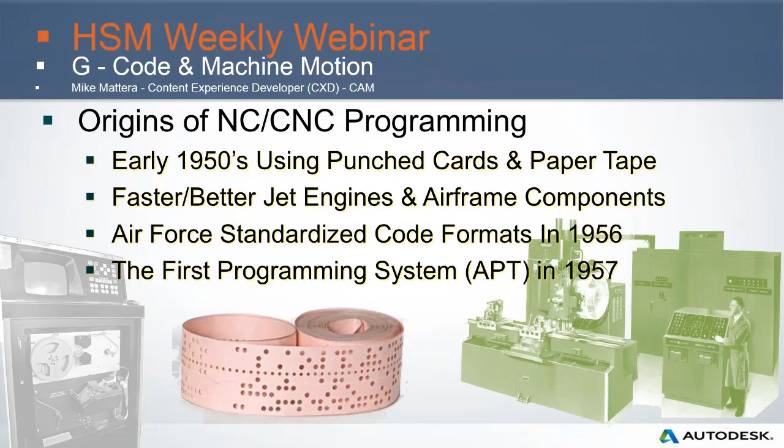So G-code programming. Why alphanumeric codes? Why did they decide that that was the best way to convey information to these machines? Well, it was a simple way to define a motion or a function, or to declare a position. We're all used to X, Y, Z axes on a machine. It was also an easy way to set a value, to select an item, or to switch something on or off. You just have some kind of an alpha letter designation with some kind of a number designating what it's supposed to be.

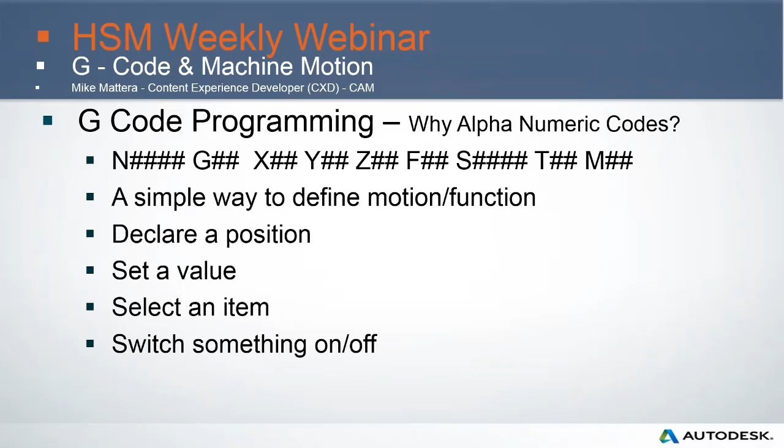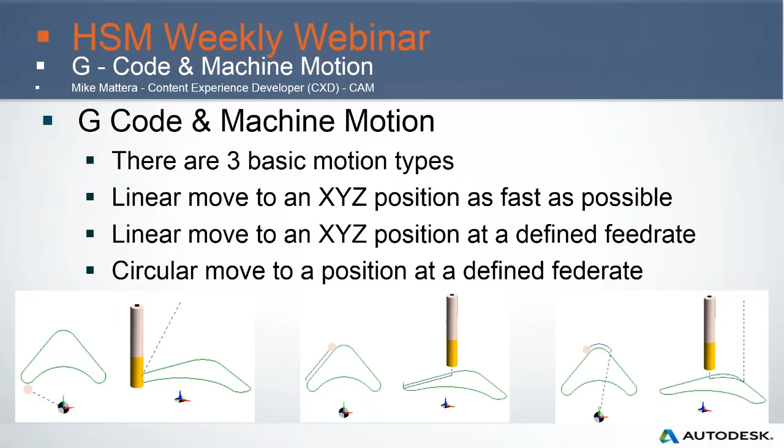Somebody decided we're going to use G, and they decided that to represent a rapid move, we're going to use G00. And that is the number 0, not the letter O. Keep that in mind when you're looking at these programs. But I like to think that they picked G0 because it looks so much like go. Go as fast as you can to this XY position.

And then we have linear feed, which is a G01. Now again, this is just a way for me to remember it, but when I look at the 1, I think of it as an arrow, a linear arrow moving along a distance. So G01 is a linear feed move.

And then we have circular motion, and there's two types, circular clockwise and circular counterclockwise. So when I look at a G02, I see the single loop for the 2, and I think clockwise. And when I see the double loop for the 3, I think counterclockwise. It's just the way I see it, and it's just something that helps me remember it. I don't think that's why they picked those, but, you know, could be. Who knows?

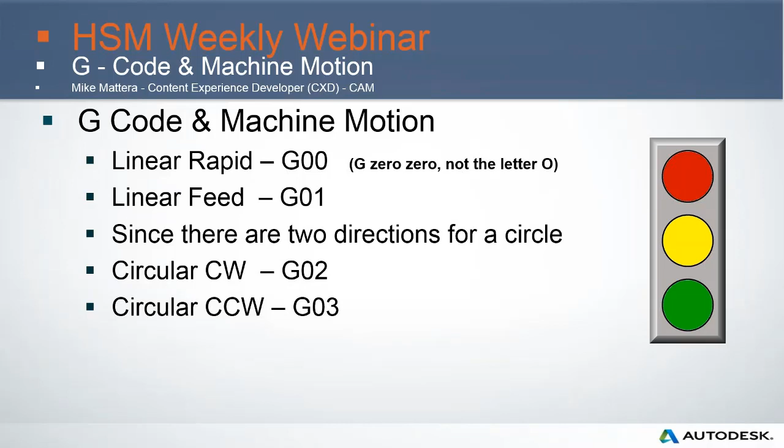So typical NC code, you're going to have some kind of an alpha and a numeric, and generally you're going to find that a G is going to be used to define some kind of a motion code. It's going to tell it how it's going to get there or what it's going to do when it gets to the point. And then you'll have something to declare a position, normally an X, Y, Z. And then we have the F word or the S word, which is used to describe a feed rate or a spindle speed. So we're setting a value for something.

And then we have the T word, which is used to select an item. In this case, we're selecting a tool. And then we have miscellaneous functions. Miscellaneous functions will switch something on or off. And on a CNC machine, there's a lot of things that you might want to switch on or off. Things like coolant, spindles, indexing motion, axis locks. There's a lot of things.

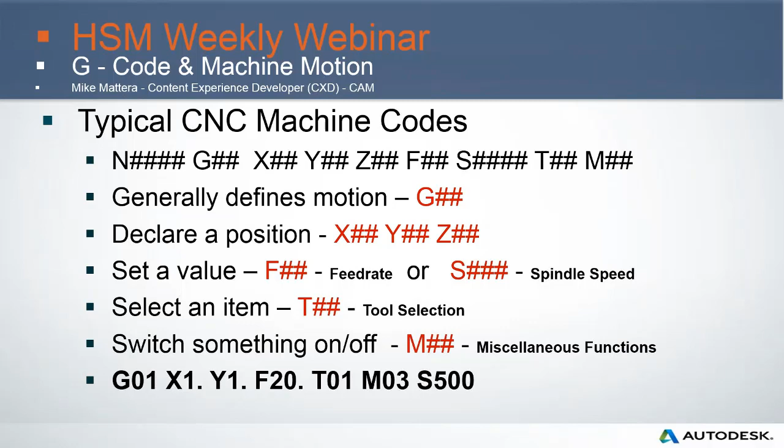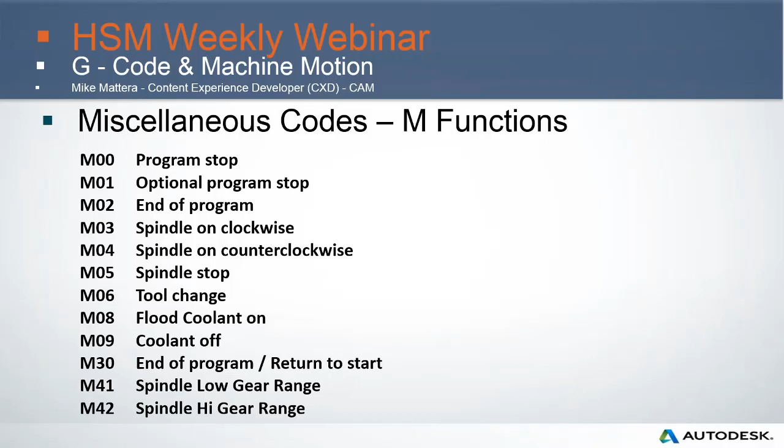Next, I want to talk about something called modality. The concept is easy. If it's on, it stays on until you turn it off. So if you have kids at home, you might be familiar with this concept. So your kids will walk through the house, and as they go from room to room, they will turn on light switches, and all the lights will be on.

And every room that they go to, the lights will get turned on. And those lights will stay on until you come home from work and walk through those rooms again and turn those lights off. So a light is an example of a modal condition. You turn it on, it stays on until you turn it off.

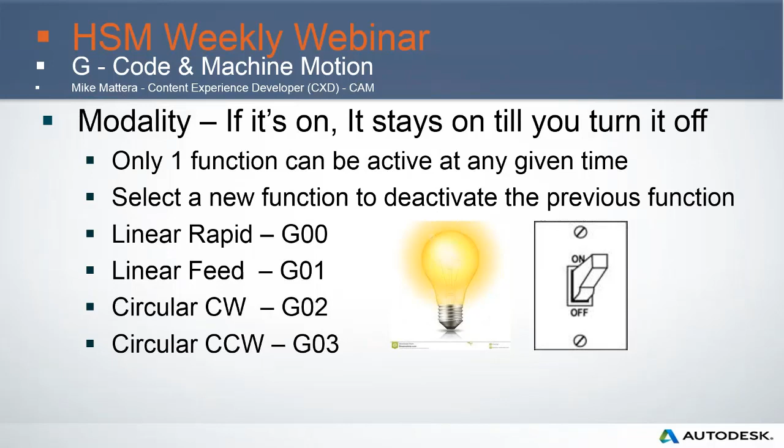Now, in the case of some of these codes, you can use an additional code to turn off the previous function. So here we have linear, feed, and clockwise and counterclockwise motion. Well, I can't do a circular clockwise move and a linear feed move at the same time. So any one of these codes will overwrite the other one.

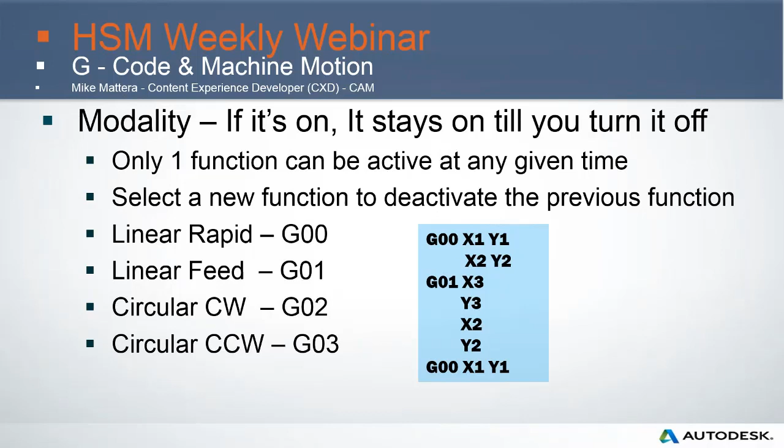So if we had a program that looked like this with a G0, which is a rapid move going to X1, Y1, the next line, I wouldn't have to say G0 again because the modal condition is a linear rapid condition. I just have to specify the XY position. Now I can say G1 with an X position, so it's going to do a linear feed to that X. Now on the subsequent lines, I just have to spell out the next Y or X position that I want to move to, and it will continue to move in a linear feed motion. So that's an example of modality. Once a condition is set, it stays active until it's turned off or some other condition overrides it.

One great example of modal conditions are canned cycles. Now, canned cycles are great because they incorporate all the motion that you would normally do to complete a common task. In this case, the task is drilling. Now, the normal drilling cycles are G80 through G89, but again, that could vary on a lot of machines. So in the case of basic drilling, you basically would move to the starting point for the location of the hole, you would rapid to the clearance plane, feed to the depth, and then rapid back out.

So if you were going to count that up, that would be 4 lines of code in your program. Rapid to the start, move to the clearance, feed to the depth, and rapid out. So if I had to go to the next location and do that again, I'd have those same 4 lines of code if I didn't have a canned cycle. So you could imagine if you were trying to drill 500 holes, that would be a lot of code. But by specifying the canned cycle, all I have to do is tell it once what I want to do, and it'll continue to do subsequent holes.

Now here's an example of a peck drilling cycle where it's taking multiple pecks to get to the final depth. Now you can imagine if I did that all with linear moves, that would be a lot of code just to do one hole. Here's an example of a counterboring cycle where it'll feed to depth, it'll dwell, and then rapid out. So that's for counterboring or polishing up the bottom of the hole. And here's another one. This is a tapping cycle where it will feed in, reverse the spindle, and then feed out. So this would be used for threading a hole, tapping a hole.

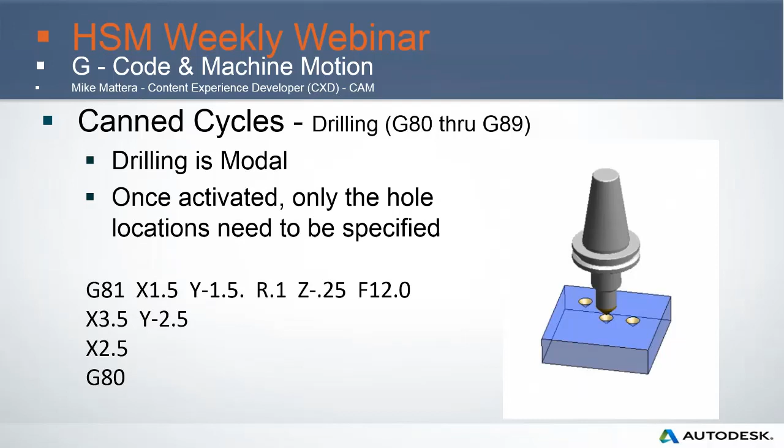So again, it's a modal condition. Once we specify the drilling cycle and the location and what we want the depth to be, all we have to do after that is specify the subsequent locations. So you can see that this would save an awful lot of programming if you had to write this program manually.

Now the next thing we have to have an idea of is code groups. Now I mentioned that a G01 will override a G0 or a G2, but there's other codes that are in that same group. So with a G81 drilling cycle, I can override that with a G80 or a G82. I can have any of these codes on a single line, but you can only have one code from each group on a line. So here we have plane selection, we have things like cutter compensation, so I could have one code from each one of these groups on a single line.

At the bottom you'll see the work offset codes, G54 through G59, and that extends out on some machines to be G59.001, 002. So you can have extended work offsets. That allows you to shift your 0 to different locations on the workpiece or different locations on the table.

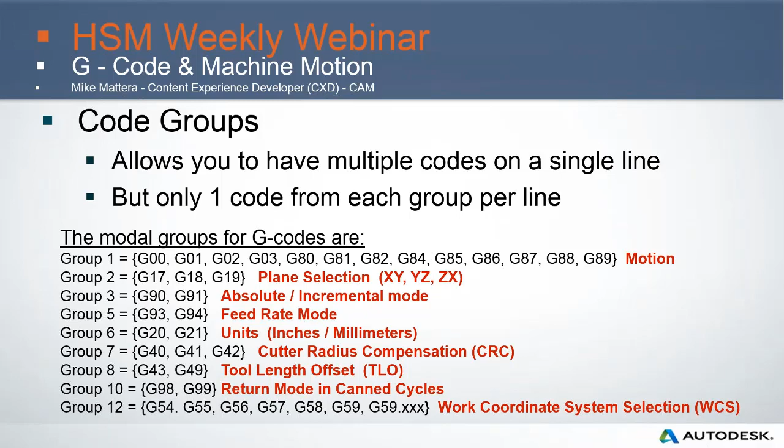All CNC code is not G code, but all machines require the same information. Not all the information is going to look the same, and that's the reason why we have 1,000 post processors in our library. Because every machine builder can take a standard CNC control and make it do whatever he wants. So because of that, we're always going to have little variations from machine manufacturer to machine manufacturer, even when they might be using the same control.

So here's an example of the kind of things that we would need to know in order to perform some kind of a CNC task. In this case, the task is creating an arc or a circular move.

So we have the green dot, which represents the starting point of the arc. We have the blue arrows, which represent the cutting direction, which could be clockwise or counterclockwise. And then we have the red dot indicating the end point of the arc. So you can see there's 4 different ways to get from the green dot to the red dot.

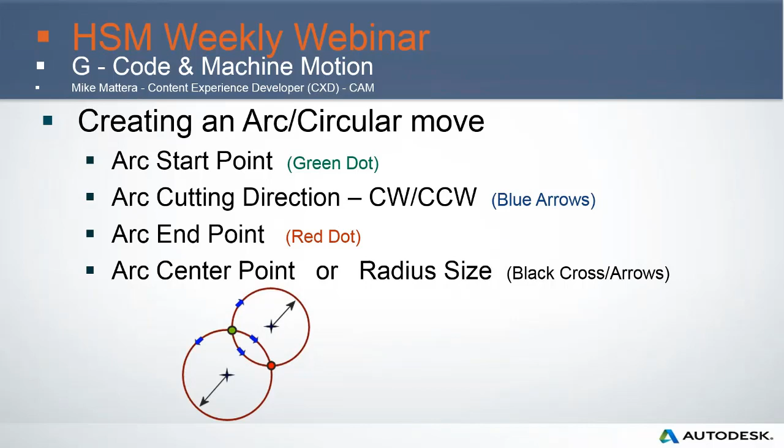But we narrow that down by giving the control more information. So when I tell it the direction that I want to go, and then if I can tell it the center point of the arc or the radius size, those are also ways to tell it specifically the kind of arc that I want to create. So we have to have that information to do an arc, no matter which control you have. It has to know these basic things.

So here's an example of what that code might look like. The first blue bar up on top shows the code that you would use for a Fanuc control or a Haas control. They're very, very similar in format. The first one shows an arc that uses an X, a Y, and an I and a J to describe the center. Next to that, it shows an X and a Y and a radius. So it's using the radius, an R plus or R minus, to determine which portion of the arc that it's doing. So that's 2 different ways of doing the exact same arc in the same control.

Next is the control that I have, which is an Anilam control. Now, Anilam was known for their conversational format. So when we look at this, we can see it says arc clockwise. We have the X and Y position. It says arc center, X center and Y center. So it's pretty obvious what that represents. And then the feed rate. And there's another way of doing it, again, within that same control, where you can say arc clockwise, the X and Y endpoint, and then we specify the radius.

And then one of my all-time favorites at the bottom is the Heidenhain control, where there's even more variation on how you can do exactly the same kind of an arc. So they do it with 2 lines. The first line describes the circle center, and the second line describes the circle direction, CW, the X and Y endpoint, and the feed rate.

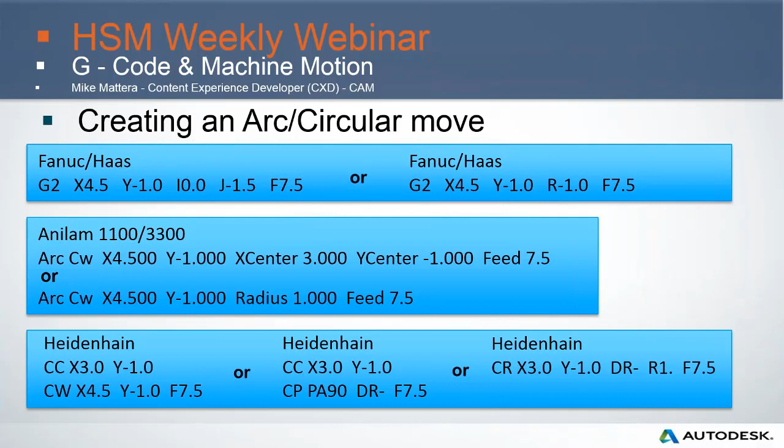So post processors, let's talk about that. A post processor is basically a translator. It translates the image of the toolpath on your screen into the language for a specific machine control. So basically you can see our toolpath here on the left, and we can see some code here on the right. It's a standard G-code format. So we have a lot of these different translators because there's a lot of different control types.

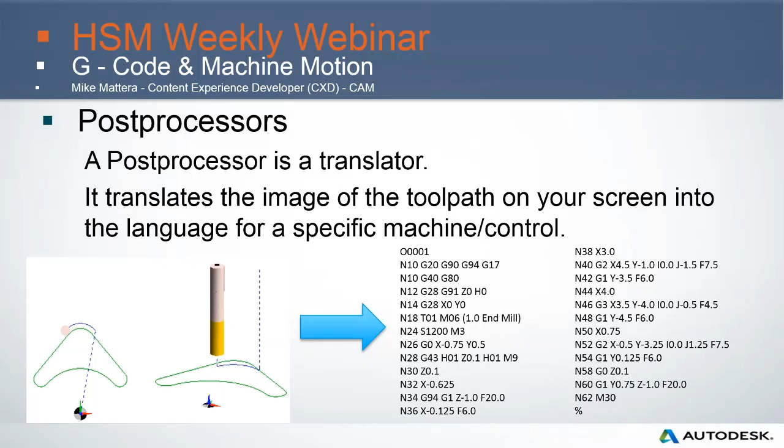Now, if you needed to have a post processor made, these are some of the things that anyone would need to know in order to help you create that post. We would need to know the machine manufacturer's name, the model of the machine, the control that's on that machine, and the model of that control. That's going to tell you which post processor you should start with as a base sample. So if you just downloaded Fusion and you just got your first CNC machine, basically you want to find that information and use that to search through our post library and find something that looks like it's going to be close to what you need.

And then you're going to use one of our sample test programs. I'm jumping ahead in my list here a little bit. But you'd use the sample test program to create code using that standard post. Some of the other things we need to know is the type of machine, the number of axes, and the axis designations. So is it a vertical mill? This is 4-axis, and the axes are called X, Y, Z, and A. That tells us a lot about which post to use. We would need a list of the G codes specifically for that machine and a list of the M codes for that machine.

So now when you take one of our standard posts and our post baseline test program, you can create code and make the changes that you need to send it out to your machine. You'll probably have to make some additional changes at the machine to get it to work specifically for your machine. But once you have that, that's the sample program we're going to use to help modify your post.

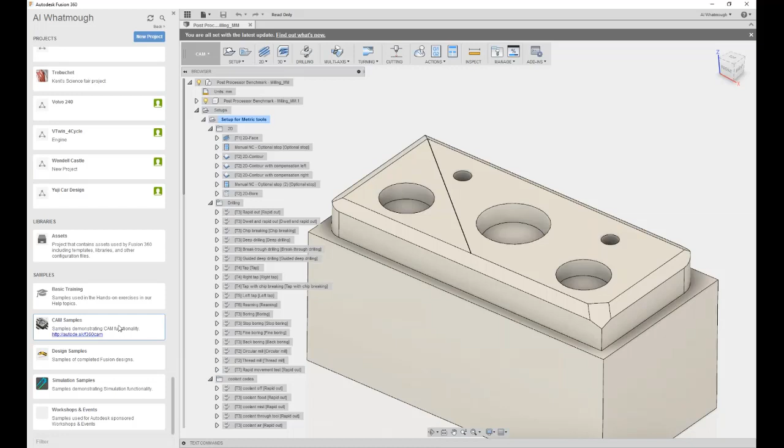But if I go into CAM samples, for many of you learning the product, again, a shout out for all the sample files. You can see ways different parts have been programmed and reverse engineer things, which I think is very helpful for many machinists, your tradespeople that learned on the job, and this is a great way to reverse engineer things.

But inside of here, there's a post-processor folder, and here you're going to find some benchmark parts that test all of the functionality of the software, the basic motion, as Mike had said, for water jet, for milling, and for things of that nature.

So if I take a look at something like I want to verify my drilling cycles, which Mike had talked about, we can look at a chip breaking cycle. We have two simple holes. I can select that operation. I can select post-process, pick a post-processor, and start to validate whether or not it's going to work on my machine. So I'm going to pick the Haas post. I'll give it a number, and I'll hit post-process.

There's a couple of things I want to show here in regards to what the post-processor can do. I probably should have prepared for a demo so that I'd know that brackets was already installed.

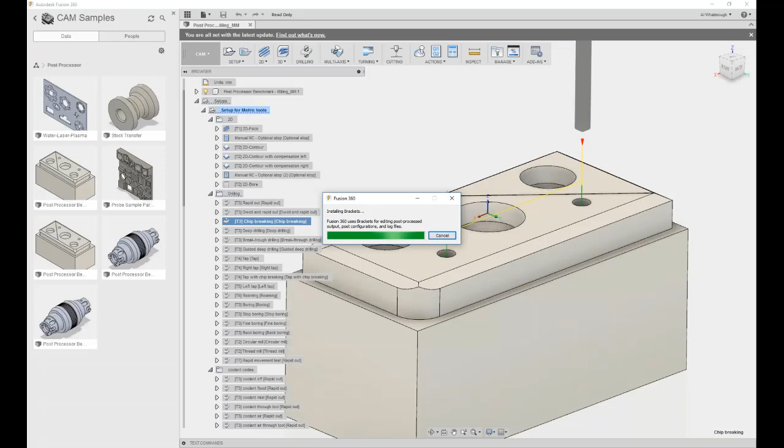I do also see a question around DXFs. Jeff, I'm sure you're aware that there is a DXF post that outputs based on color. Jeff is asking about a post based on layers. It's a great question, and I'll let one of the experts on the call here dive into that.

So this is actually interesting. What I have here, and I purposely selected the Haas post with chip breaking, I'm actually seeing this drilling cycle expanded out. You may see that there's instances where the post processor actually understands what the machine can and can't do.

In this case, our software has an ability to do incremental retracts. It'll peck, peck, peck, and then come out. That wasn't one of the canned cycles Mike talked about because it's not a common canned cycle.

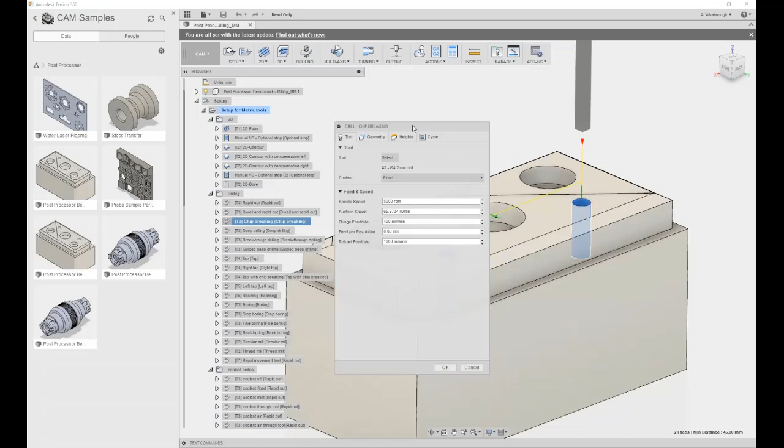If I come into this operation and I edit it - sorry, it's on my second screen here, I'll drag it over - and I come to the cycle, you'll see that I have an accumulated peck depth.

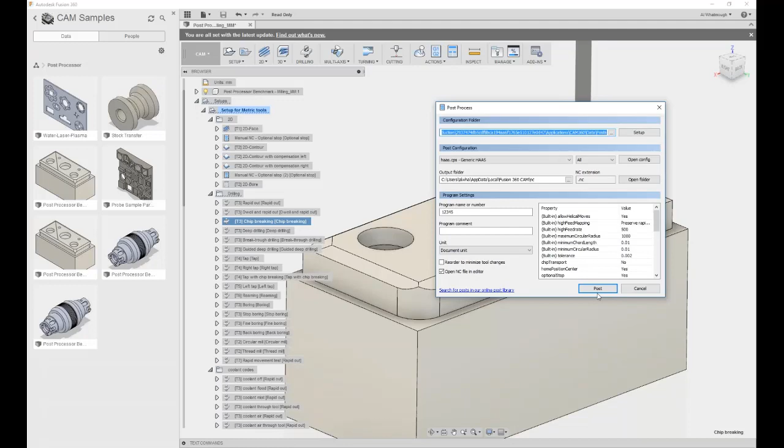That means every 5 millimeters we're going to come all the way out of the hole. So I'm just going to increase that to something like 500, so it's more than it would produce an incremental retract. And then I'm going to post-process again.

And now I have a chip breaking cycle. I wanted everybody to see that because sometimes you look and wonder, why am I not using a canned cycle? Well, the post processor is actually intelligent enough to know that we created a cycle that a canned cycle didn't support, so we went and automatically expanded the cycle. But then when we put a set of options in that didn't require the incremental retract, something that currently Haas doesn't support, we could then return to using a canned cycle.

So I think that's maybe a helpful trick. The other little trick I'll show here quickly is if you're trying to do some multi-axis programming or 4-axis programming, you'll see some very simple moves that do just a simple rotation so that you can look at a very short piece of code and identify whether or not that's happening.

I see some questions around coolant. So again, with a very simple cycle, test the coolant code. So hopefully those are some nice little tricks for how you can leverage these parts to validate a post-processor.

If I could expand on what Al brought up about the peck drilling. So again, this is the reason you want to have a good CAM system, because it gives you capabilities far in advance of what your machine would normally do. So we have a more advanced pecking capability than that particular control might have. So basically we're expanding on the capabilities of what the machine could normally do.

Okay, I see some other questions here. Let's just take a look and read through them. Some people are asking for a G-code simulator to practice with. There are a number of options out in the market, and it's going to be largely driven by budget. So that's a difficult question, but maybe some of the other experts on the line can jump in and try and answer it.

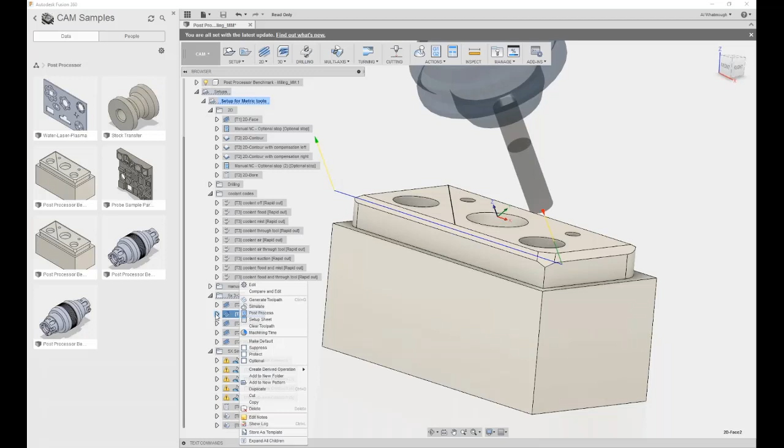I used to use one called NC Plot. There used to be a free version of NC Plot, which just did basic milling code, but you can upgrade it, and I don't remember how much it costs, but it'll do more advanced code, and it actually reads the NC code and plots it on the screen. So NC Plot is one that I'm familiar with.

So Neil had a great question, which sort of ties into this same thing. He wanted me to show how we see the toolpath, and I'm actually going to show two tricks here that many people probably don't know. The first is if we expand out an operation, you're going to see the tool, and you're also going to see this little 110 bytes. That's telling me how big the internal representation of the toolpath is. Just looking at that size is actually very helpful when you're playing with smoothing options to try and reduce the size of your program. So that's the first trick.

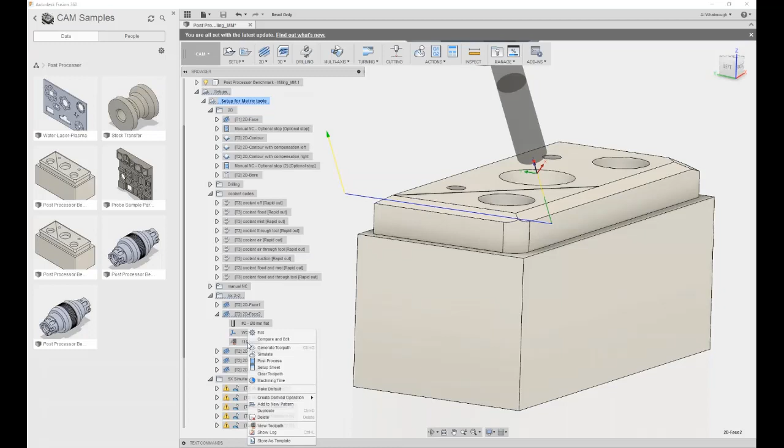The second trick came from Neil's question showing what the toolpath is. So if I right-click and say View Toolpath, I'm going to see the internal data that the CAM system has that ultimately it passes to the post processor. I need to make a line move, and I'm rapiding. I need to make another line move, and I'm rapiding. I'm then making a linear move. I'm now doing a finish cut. So these are the simple types of motion that Mike described earlier in the presentation that the post-processor then converts into the language that your particular machine needs. So thanks for drawing attention to that, Neil.

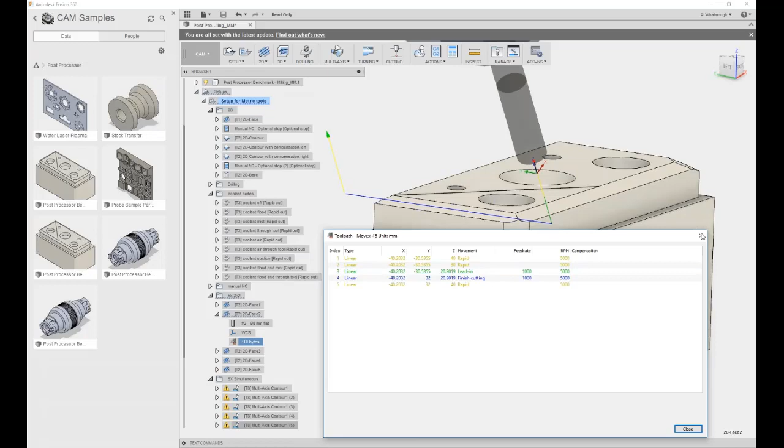So this question is starting to go off in a different direction, but Timothy is asking for a good resource on writing expressions. For those that don't know what the expression is, if I look at this face milling operation and I were to change the tool, so I'm going to just select a different tool.

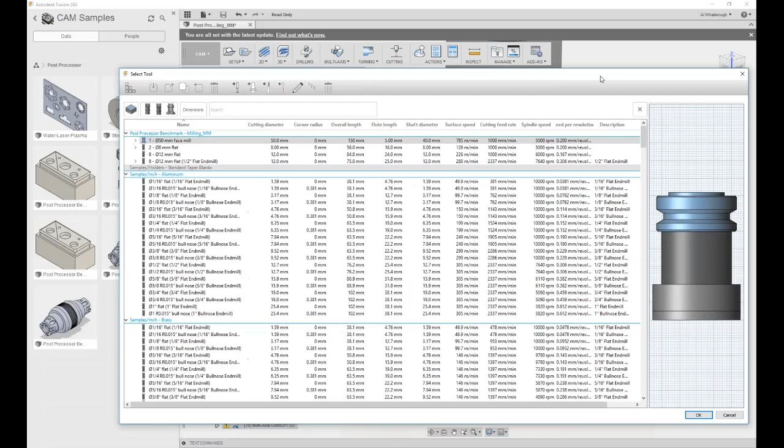And again, I have dual monitors. If any of you don't have dual monitors, you should. I don't know how you do engineering software without it.

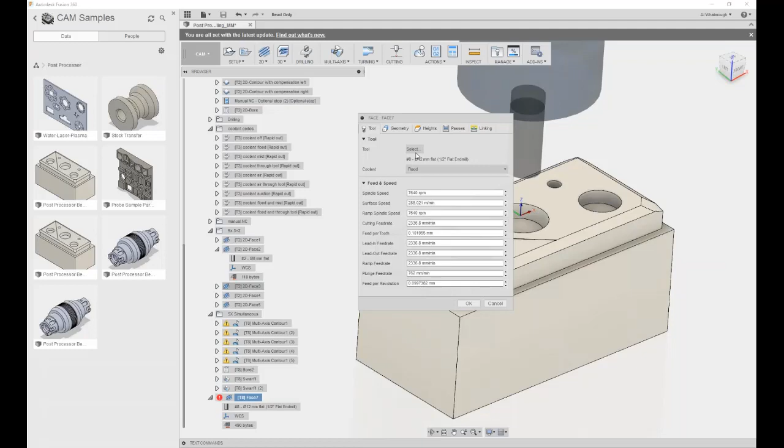But anyway, I'm going to change the tool, and you'll see immediately I have a slightly different step over. And that is driven, well, maybe it wasn't in this case because this demo is changed. So this particular file locked in a step over. So let's do a new facing operation. I'll do a new facing operation, and I have a tight step over, and then I'm going to edit this operation, and I'll select a larger tool, and instantly I have a larger step over.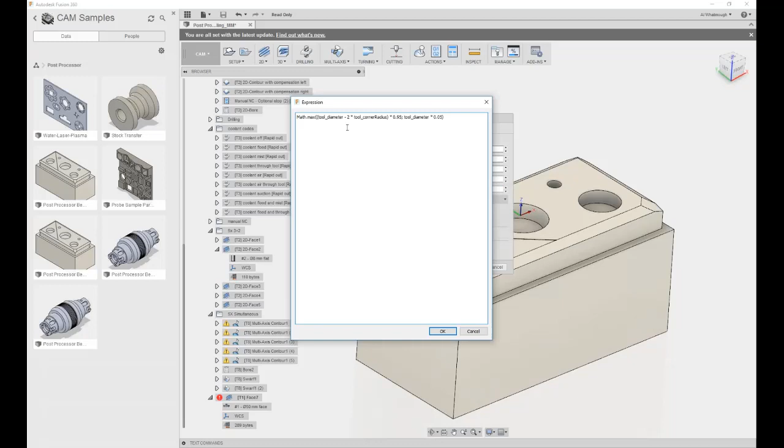That was driven by an equation, and obviously in that last operation the equation was changed. So the equation is over here on the step over. If I right click, I can say expression, edit expression, and we can see this bit of math that's deciding how we calculate that particular step over. In this case, it's looking at the maximum value between the tool diameter minus the corner radius, or 5% of the tool diameter. What's the biggest of the two?

What's the purpose of that? Well, if you use a ball nose end mill, you want to still have a solvable solution. So this is a long answer to your question. The answer to the question is this is all JavaScript. So looking at any documentation on JavaScript is a great place to start.

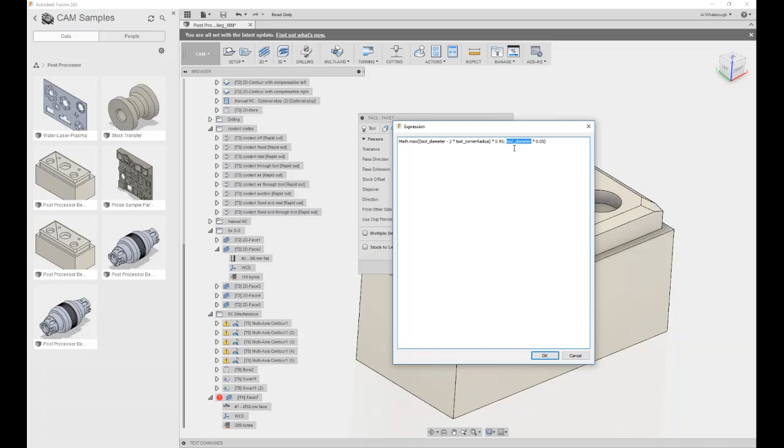The next bit you need to know when you're writing equations is how do I find out what these different parameter names are? And the trick to that is when I hover over a tooltip, there's a slight delay. Let's hold Shift,

and John Saunders just caused a little bit of stir on this one. I appreciate him doing it in one of his videos. If you're not watching it, you should.

He was having trouble with this, but hold Shift and then come over the field. You're going to have to wait a few seconds to see the tooltip, and then on that tooltip you have a different tooltip that shows the parameter name. In this case, we can see the pass angle. Do pay attention to that lowercase p and the uppercase A. That does matter.

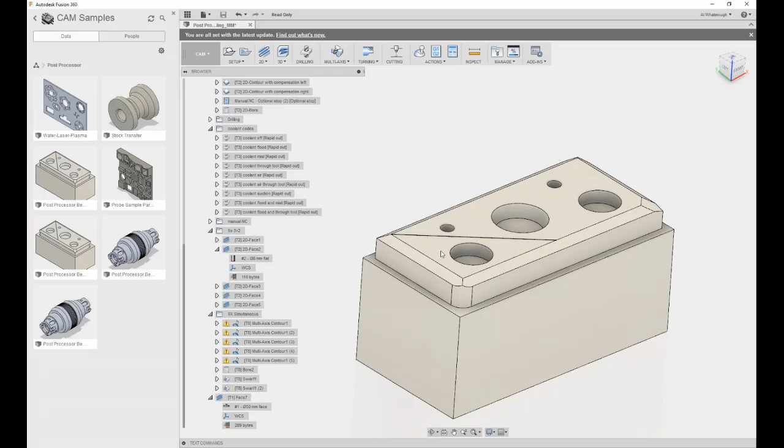Okay, hopefully I didn't spend too long on that question. I've got a question here I'm going to field from Jonathan. Why does it sometimes pick linear moves to create a curve and sometimes an arc movement, G1 instead of G2? And that kind of depends on what type of curve you're cutting. So if you're cutting something that's more of a spline curve, then it may not be represented as a true arc. So then Fusion or HSM will break that up into a series of linear moves to create the same motion within whatever tolerance you have it set to.

But something that you can do to clean that up a little bit, and Al's going there right now, is the smoothing function. So if you are cutting something that's more of a spline curve, the smoothing will filter that back into arcs for you. It'll give you a smoother contour and a much smaller program size. So that's something for you to look into, Jonathan.

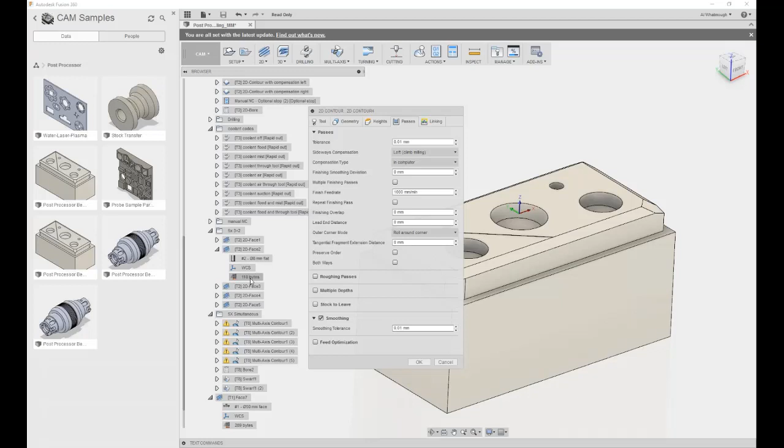And so there's two more things I'm going to add to that. First, why is it called smoothing? Oftentimes people say you should call it arc fitting. The fundamental reason it's called smoothing is smoothing will also use lines to best fit across a series of toolpaths. So it can use either lines or arcs to reduce the code size, and that comes back to sort of looking at this code size value to see what's happening.

The other thing you do need to be very aware of, and this will play a part, is your post-processor. So if we look at any post-processor, we've got this series of defaults that are called built-in defaults. The top one is allow helical moves, yes or no. We're defaulting to yes. Some machines don't allow a helical move, which is an arc that's actually going down in Z at the same time. So we may have had that arc in the internal representation of the toolpath, but then the machine doesn't support it. So now we're going to turn it back into a series of lines at the built-in tolerance.

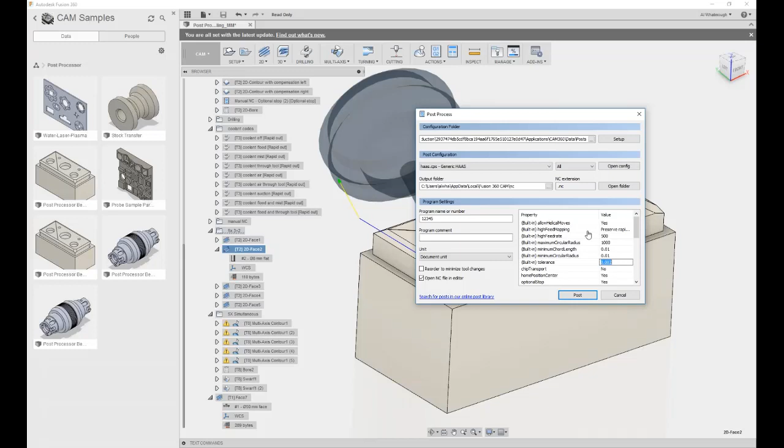So it is important to know that even if it's an arc inside of the CAM system, and maybe a good example might be this helical bore, I have some arc moves, but then I may have a machine that doesn't support that. So we're going to need to linearize it.

And just maybe a quick tip, if you're trying to find if your machine will do it, it's actually pretty scary. I've seen some machines do it. Many won't even give you an error. It'll actually just do an arc and then drop in Z by whatever it was supposed to drop, and then an arc and drop in Z again. So you may not get an error. You may just get some real funny motion on your machine. So it's nice to test with a very aggressive helix.

I have Renee from Copenhagen correcting me. Feel free to unmute and add anything that I may have said that's wrong. I'm far from perfect.

Yeah, just one thing is that often we would output arcs that are not in the primary planes, G17, G18, and G19, and those arcs would have to be linearized to run on the specific CNCs. So we try to generate tangential motion. So if you run a parallel in 45 degrees, you would definitely get arcs that need to be linearized if the machine doesn't support it.

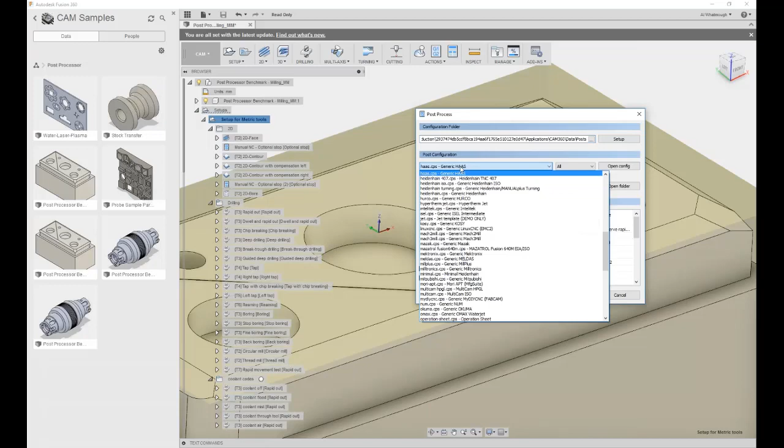Yeah, when we were talking about those code groups, actually that plane selection that he just mentioned earlier, so G17 is the XY plane, G18 is the ZX, and G19 is the YZ plane. So that tells it which plane you're doing your contouring in. So normally we think of doing contouring in XY, but you don't have to just contour in XY.

So if you pick a different plane, we can swing an arc in Y and Z or X and Z. But if you think of a circle that's tilted at an angle, that doesn't actually conform to any plane. And that's, again, where we'd have to output it as individual linear moves.

So Kevin asked a question, how do you get all the parameter names? One way to do it is to use the dump post processor. Those parameter names are the same there. So that's one way you can do it. The dump post processor basically exposes all of the information that the post has.

There's also another question from Mike here. What's the difference between Fusion and HSM? The correct answer is Fusion is a less capable version of HSM. That is a complete joke. The underlying technology is the same across all three of the HSM CAM products, whether that be in SolidWorks, in Fusion, or in Inventor. Now there are some differences.

There's some cases of things that we did in HSM Works where when we were given a second opportunity to do it again, we chose that we wanted to take a different path. So there are some things in HSM Works like machine simulation and wrapping of 3-axis toolpaths where we made a conscious decision to not port over as is, but take a slightly different approach on how we do it. So you've seen that in how we've released wrapping of 2-axis strategies instead in Fusion, and that has not made its way back into HSM Works.

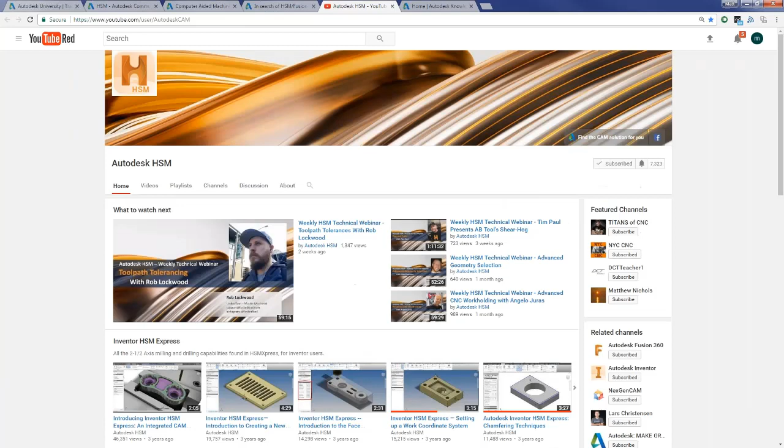Post-processor adjustments: there's a nice post in that forum where you can find help. There have been a lot of questions on that recently. The HSM YouTube channel, where all the recordings are posted. There are also a lot of quick tips and great content, so we encourage everyone to follow it. When new videos get posted, you will get notifications about that content.

And the last thing is the Autodesk Knowledge Network. There are, I think, over 1,600 articles focused just on HSM. If you go to the top search here, HSM is one of the fields. Maybe not, but if you search HSM in the search bar, there's tons of great content. If you're working in your shop late at night and there's something you can't figure out, there's likely information on the Autodesk Knowledge Network that'll help you solve your problem on the spot. So we encourage everyone to use these resources.

These were internal application engineer resources for Autodesk, and now they're available to the general public because they were such a useful tool. These are the resources we bring up every week, and we encourage everyone to really leverage them. They're free for our community of users, and they'll make your life much, much easier.